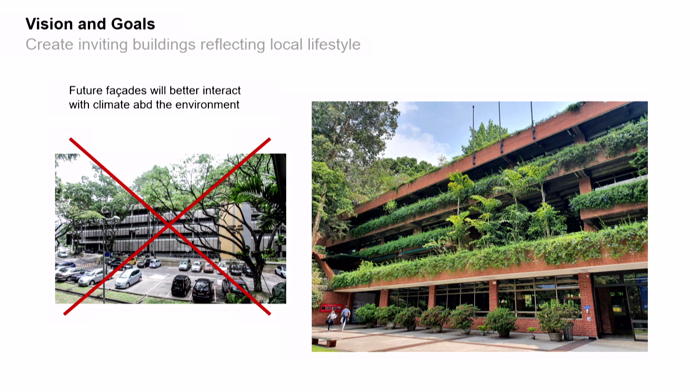What we saw in this building basically was a huge opportunity, envisioning ourselves the changes which are required to create a building which is comfortable, which is inspiring, where I would like to work, where I would like to teach, where I could imagine my children to study. That was the idea, to think about how could the facade look like? How could the facade, instead of being a barrier between a carport and a building which is completely sealed, become something which is blending between inside and outside, pulling people into the building and becoming a nice entrance. We started with the vision for the people.

And what we found, it's so obvious that that building needed a change, because there was no daylight, there was no view to outside. Even the fresh air you cannot call fresh air. It was bad fresh air, low comfort, no quality. So that was basically what we found, but we saw there is more opportunity. Just one more slide for the facade. The facade was designed to block off tropical sky, but basically ended up blocking all daylight.

So with this starting point, we have been trying to support the design team around Eric with communicating ideas, potentials, what we see. And I remember walking with Eric through the building, standing up on a chair, trying to open the false ceiling, taking the flashlight of my camera, flashing into the false ceiling, and I just received a black image. Nothing. This was a huge volume, black and blinding out. Even with my flashlight, I couldn't see anything. So we figured out there needs to be something. There is something.

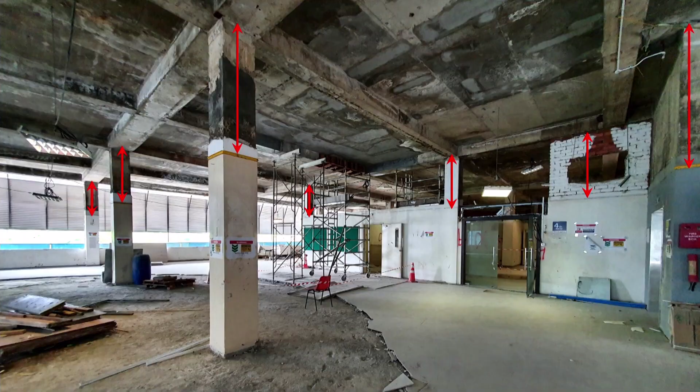And we offered analysis like this, here you see what has been hidden in this diagram. So we offered diagrams where we always looked at how we see the existing, and keep your eye on the word existing, and what is the potential. If you really get all the false ceiling out, this is the potential we saw.

We never made these inputs to Eric and to NUS as design decisions. It was more food for thought. It was like, we see this potential, take it seriously, don't let a physicist like myself design something. Take it with your professional qualities as an architect and take it further into design. Again, we showed this is the existing quality at the moment for daylight, and we could imagine that it becomes a far more daylight autonomous building with a higher daylight autonomy.

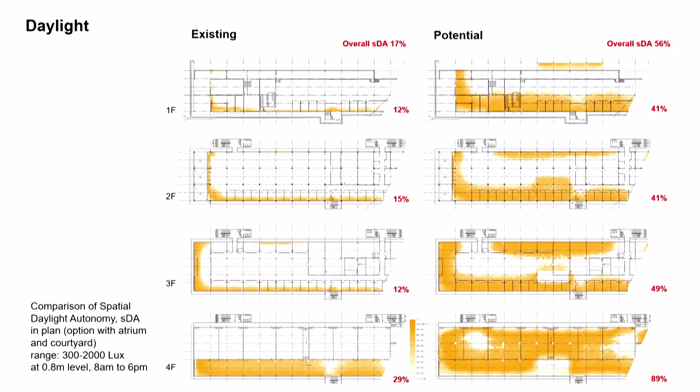Similar things for the thermal zoning, for the natural ventilation. Because of no daylight, no natural ventilation, because of the closed facade, it was a completely air-conditioned, sealed building at that time. And we suggested, let's be crazy, just make 2/3 naturally ventilated. I'm completely aware of the limitation of natural ventilation in your climate, but we suggested this to have a strong voice for changing something, for making the facade and the building as an entity operational for people. Thinking about hybrid comfort, thinking about a different zoning which allows you to think completely differently about how such a building could work.

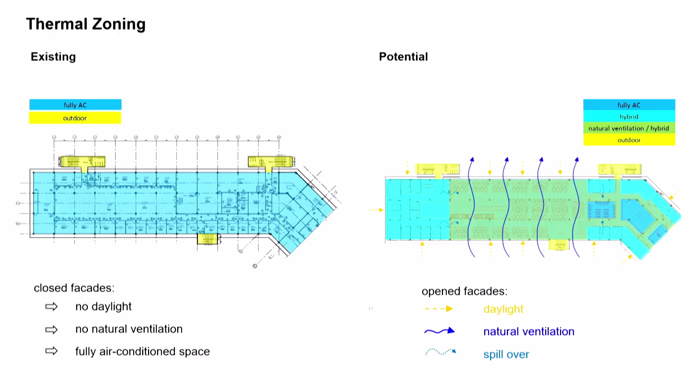This is a typical section which shows elements we evaluated in that early schematic design change, to verify this is not just dreaming, it would work. This kind of building would work, and that's what we then sent back, exchanged with the design team of Eric to say, trust, it works. We can have the facade upgraded, the windows upgraded, we can have daylight. Your external shading system, which was nicely designed and taken over by Eric, works. It brings daylight into the place, and you see in the next slide how it's implemented.

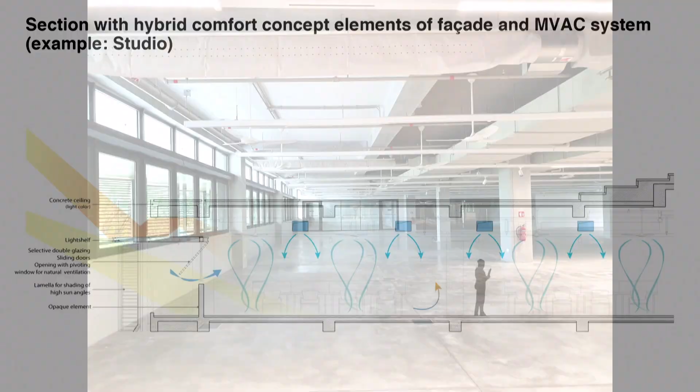You have seen these slides before, so somehow you see brotherhood in mind between architect and physicist and climate engineer. We had not been talking about what we were going to show. Just see the white ceiling to make it better bouncing back, and I will finish this part of my presentation. I was visiting the space with Eric a few months ago, and I was specifically looking for that position in the studio where this famous quote was taken, and it looks like this.

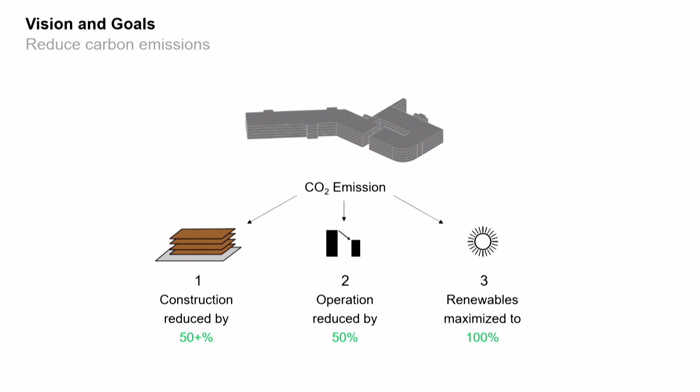Let me zoom out from here and talk a little bit about low carbon design. Basically, what we typically do when we start working on projects, we try to create a vision with the design team and with the client, laying down 3 basic steps: reducing carbon emissions in the construction, in the embodied carbon, reducing carbon in the operation, and replacing all the energy with renewable energy. This 3-step, kind of simplistic, is a super strong story to help everybody along the design process keep track of what we are doing.

Typically, and professionally speaking, that's done with a life cycle assessment, and there are the different phases on the screen. What my company, Transsolar, has done for 30 years is typically focused on a sub-phase, which is B6, operational carbon because of energy use. What we did for this project, we looked for cradle-to-gate carbon numbers in the construction, and we added the reuse or the omitted carbon emissions because of the adaptive reuse of the buildings.

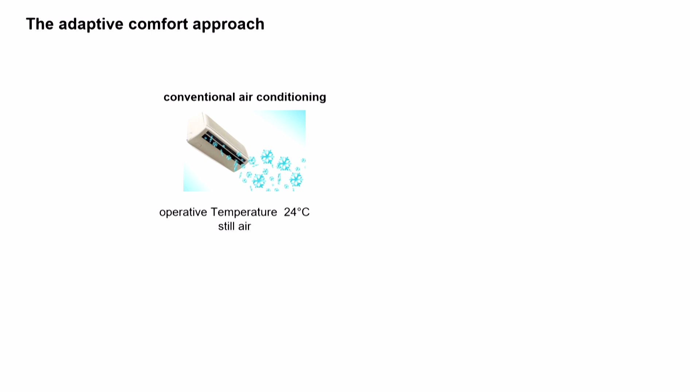And we went through that process. Many of you who have been working with me know that we have been instrumental in implementing the hybrid cooling system in the School of Design number 4. I will not talk about it, just show one slide. It is the idea of making comfort in a different way, which is similarly comfortable, but doing that with less technology and less energy. Back to carbon in the structure. Reducing carbon in construction.

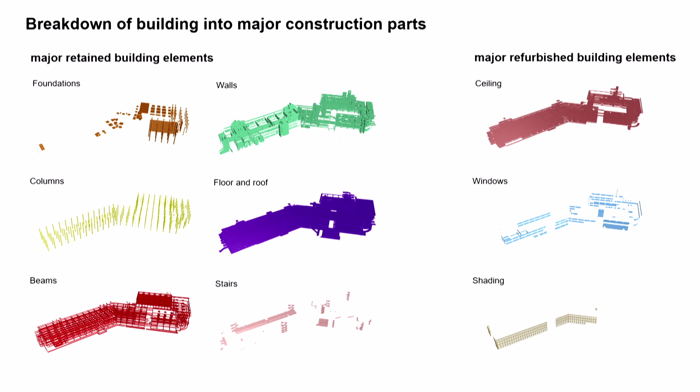What we took at that time was the 3D model we could receive from Eric's team. We broke the entire building down into major parts which are retained: foundations, the walls, columns, the floor and the roof, beams and stairs, and building parts which have been refurbished, like ceiling and floors, windows and shading. And we estimated the masses and the construction types of this, and we took images like this, and I've been talking with a structural engineer to help me.

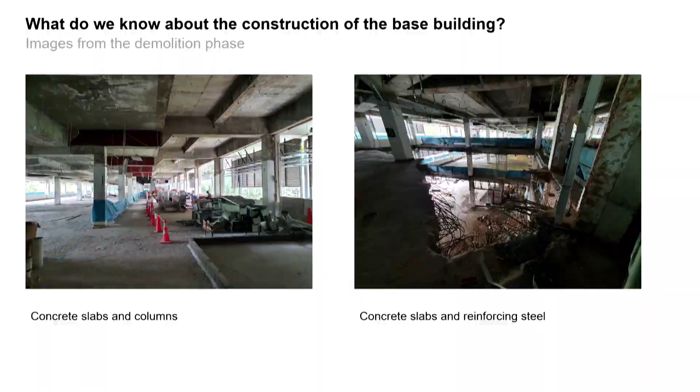How much steel could that have been? What kind of cement was that? Is that a concrete 25, 35, whatever, to get a good idea of what kind of materials have been used. This is one part. You need the material and the masses, but then you need to think about what are the specific emission factors. And at that time when we did that in 2019, 2020, it sounds ridiculous, we couldn't find these numbers for Singapore. There was no database existing.

So I said, oh, no worries. We have in Germany a good database, Ökobaudat, since 20 years. So let's just build that building in Germany using the German numbers. And the German numbers are in the range of the red dots. And we figured out, let's be careful, do the same thing for the UK numbers, ICE numbers, Inventory of Carbon and Energy, using international numbers which are published in the UK.

And then in a third step, we went through some scientific papers and publications in Singapore to figure out what are the local cement and the local concrete values for carbon emissions, in the absence of having better numbers. So we had a kind of lower, a mid, and an upper range. And I apologize for this complicated diagram.

And then based on the masses, based on these different carbon emission factors, we developed 3 scenarios. From the top, if this building would have been built using the carbon emission factors to our knowledge in Singapore, we estimated something like 500 plus kilogram CO2 emissions per square meter of floor, roughly. We figured out that the ICE would be in the middle, 400 plus, and probably the German, if that building would have been built in Germany, would be in the range of 250.

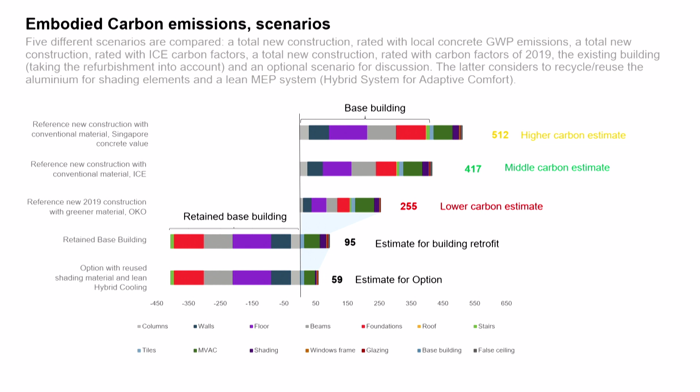And the last is what Eric was talking about. We imagined at that time a reuse of all the shading and aluminium in the facade, which we couldn't get through the design process, but that would be the last option down there. Cross-checking if these numbers make sense. Sorry, before I do that, let me set carbon emissions in construction in context and in perspective to carbon emissions in operation. That's done in this kind of carbon story here. I just use it for setting that context.

These are numbers, take care, absolute kilogram per square meter over 30 years. The golden and the brown is the embodied carbon, and you see in the first step how the embodied carbon is reduced because of the retainment of the original building. And we just had that comment before from Ken Young from BCA on how important operational carbon and operational emissions in Singapore are, and you see the huge blue bar dropping down to the super energy efficient system in operation by changing the way the building is operated.

And then it goes on with the green bars to show how much of this energy could be produced on the roof and how much could be produced in the microgrid. That was our conservative estimation in 2019-2020. Just this morning we learned that you are on net zero for one of the buildings. So we have been super conservative. Basically that means that you already go from here to here without using grid or energy which you borrow from your neighbor. I understand that you are net zero in the definition that the energy produced on the roof goes into your building.

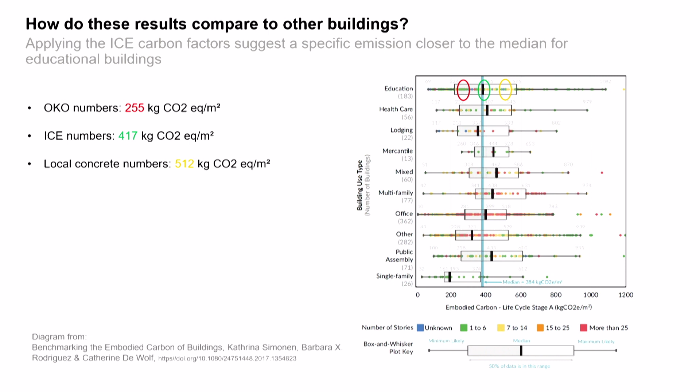The lower, the middle, and the upper range, and compare these red, green, yellow to numbers or to a statistic what we find out of the US. And it made sense for an educational building that they somehow, with the different use of carbon databases, somehow mimic the range of existing buildings in statistics. So we felt quite good.

But when I was looking on the then, a year later, published data from BCA, I was surprised to see that BCA has numbers for non-residential in the range of 1,000, 1,500 for residential, and 2,500 kilogram per square meter carbon emissions, which is quite high. And being a scientist, I think this is something where I suggest that universities, that NUS, dig deeper, make a deep dive. Where is that coming from?

As much as I trust that we have found the kind of yellow, green, red range, if that building would have been built according European standards, I think there needs to be some truth in these super high numbers for embodied carbon in Singapore. And I can imagine that by the different bylaws which exist in Europe, which force our construction industry to be very material and resource efficient, as a byproduct, we already use less material and have less embodied carbon.

I think that's something which I really suggest to be a research topic in the next years for the NUS, to figure out where the difference is coming from. I've been visiting buildings here, high-rise buildings with transfer slabs of 7 meters high, things which are not existing in Europe. I would not be aware of a building, you probably, Hussein, but I would not be aware of a building where I find transfer slabs of that massive material, steel and concrete use.

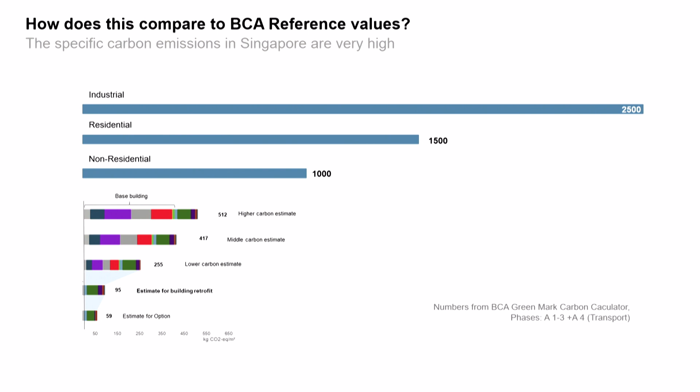So I suggest to figure out where that's coming from to bring both worlds somehow together, because we need to explore the low-hanging fruits. And if this would be that the construction can be smarter using less material, that would be my first choice to do. Because this is something which can be solved with intelligence and with money. Okay, 3 more slides. I zoom out.

What really matters are low carbon projects. This is an example I've had the privilege to work with in Sydney, a high-rise building. And what you see is a building, and you see it a little bit, it's stacked out of habitats of 4 plates. And these habitats basically are concrete steel slabs on which a 4-level completely wood building is sitting, and then again another concrete steel slab and another wood building. This is to bring both worlds together.

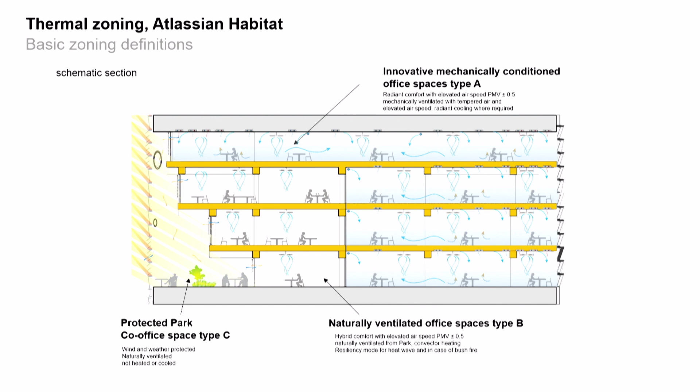You can do that out of concrete, but you can put wooden structures into this and use the benefit of the strength of the steel and the concrete for the structural stiffness, and put in the wooden structure. Why would you do that? Because industry and building industry, and that probably sounds ridiculous to you, has a possibility in the next 30 years to contribute through absorbing biogenic carbon into our buildings to buy us time.

By getting wood, CLT, mass timber into the buildings, and keeping it safe in a building, we reduce and we bring carbon and biogenic carbon out of the atmosphere into a kind of storage process. And we are going to build a lot on this planet. So there is a kind of inherent storage possibility in the design of buildings if we would like to explore that.

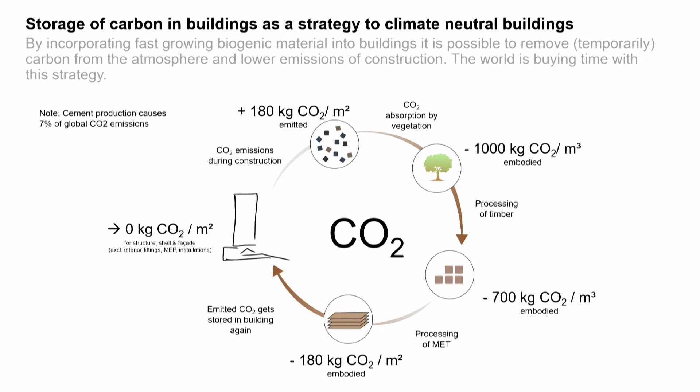And that cycle matters because as much as we like to and need to work on reduction of emissions, at the end, we still have emissions. It's still more carbon in the atmosphere than before. And the only mechanisms which exist are nature and bio-driven mechanisms. Trees and our oceans, which absorb carbon out of the atmosphere.

And we need to absorb carbon in a range, and that's a number I learned on the 80th Forum for Life Cycle Analysis in Switzerland. We need to absorb carbon and store carbon if we want to make a benefit to the climate for 300 generations. 100 generations to 300 generations. That's something like 3,000 to 8,000 years.

And when I heard these numbers, oops, hard to imagine. What I can imagine is that we buy us time for 30 years to think, what the heck are we doing? Thank you very much.

Thank you, Wolfgang, for that. A lot of numbers to digest, but it's important to quantify. When you talk about sequestering carbon, I was thinking of keeping the soot in the chimney. That kept the carbon there.

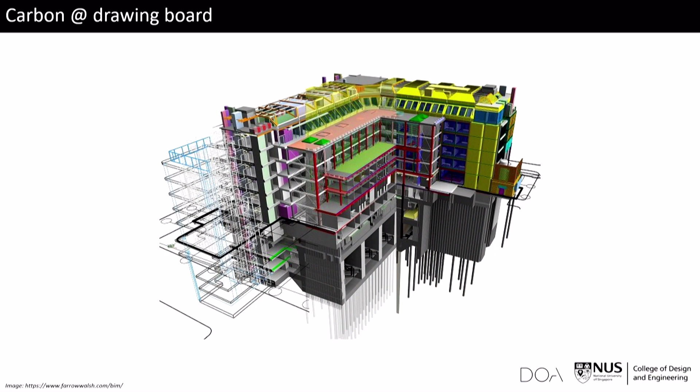Now, carbon in the teaching of design is very challenging. Why? Well, as you heard from Wolfgang, it's complicated. And if you're going to do it in a design studio in a very rapid amount of time, then it proves very challenging. I mean, every piece of a building has a carbon impact. Every piece of what you put in there comes from somewhere. And then you've got the longer issue of operational carbon and energy and where that energy comes from. Most students aren't able to process all of that.

Now, I'm going to show you the BCA carbon calculator, which attempts to reduce the granularity of the problem into a spreadsheet. So this is the BCA carbon tool, which requires inputs on quantities of each material, the place of origin, the choice of transportation, etc. I mean, this is clearly the type of tool that is very useful in what I call downstream thinking. It's a kind of an accounting tool. Once you've made the design decisions, great, it'll tell you where you are. But how do you begin, right? Where does carbon begin to shape upstream thinking as opposed to the downstream accounting?

In design, we often start with very strategic decisions about the form of the building, and this is central to what we do in the training of architects, where we talk about situation and purpose. And many of these early decisions have a very profound impact on the life of the building, both in terms of its energy use and its adaptability.

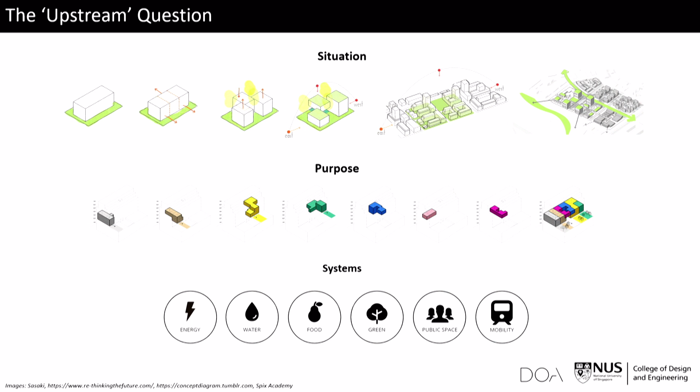In the program that I co-direct with Man Sam, we have what's known as a systems approach to design. And here we introduce an additional layer of thinking into the design process, which is to say that we ask our students to not just demonstrate how their buildings consume less, but how they then go on to produce energy, water, food, accommodate biodiversity, public space, mobility systems within the design that they're proposing.

So they have to bring into this conversation these additional systemic layers. So before I talk about how carbon feeds into it and what the carbon calculator does, I just want to show you an example of one student's work from an earlier semester. This was the work of Noopur Joshi. Typically what we do is we start the studio off by giving students projects, buildings in Singapore, and we say, now go redesign it, reimagine what this would look like if you were to bring systems thinking to the table. So she picked, rather bravely, I think, the Singapore Parliament project.

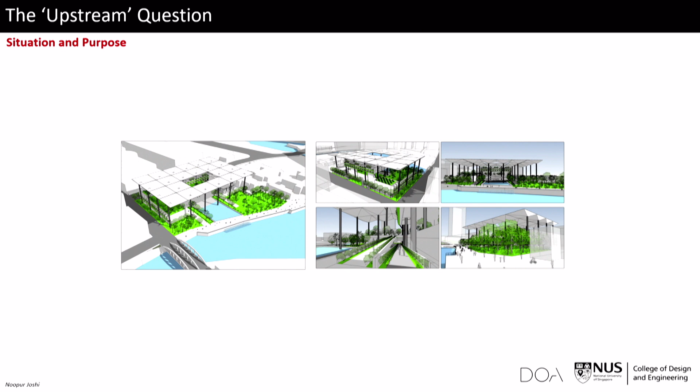The upstream question, of course, had to address situation and purpose. They're not excused at any point from dealing with architecture as architecture. Just because you're dealing with systemic layers doesn't mean that you have to forgo functionality or amenity or basic design logic, and it's got to look good as well. I mean, as an idea, it's got to have something going for it. But onto that, we then asked them to demonstrate how the project integrates layers.

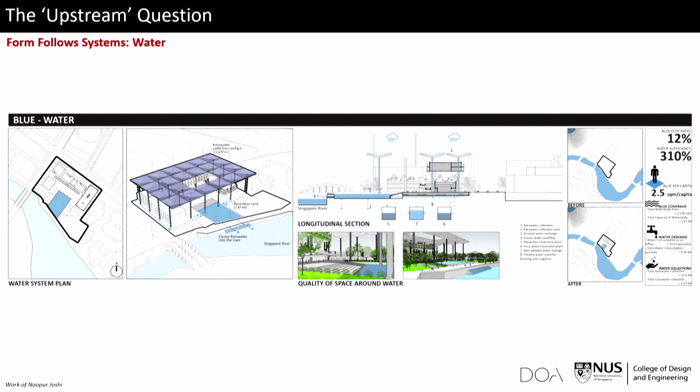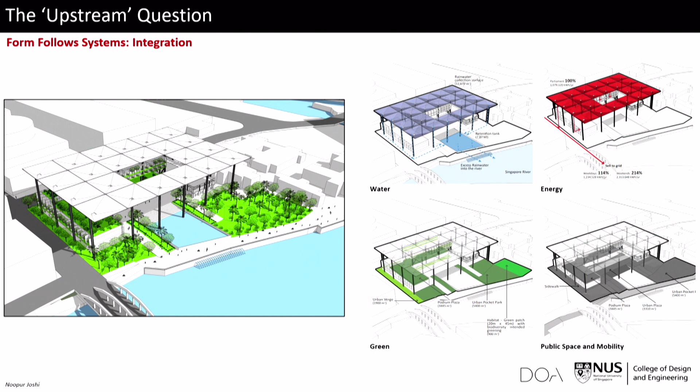Here is, for example, the integration of water as a system. Here is how energy was introduced into the system. So they actually have to not think about these things in sequence, but simultaneously. I'm oversimplifying it a little bit by showing you these images as a sequence of events, but really it's a battle. So much of it is about unlearning how they've been taught to think about design and to bring additional layers of thought into it. It becomes a battle on how to bring additional thought processes into the way you do good design.

What's interesting then is that when we step away from the work of many semesters, and we've been doing this form follows systems studio for quite a while, we begin to notice that there are a few key defining aspects that at this stage of thinking, this conceptual stage of thinking, students are grappling with. One is the boundary conditions of porosity, the envelope, space and structure. How does this relate to carbon?

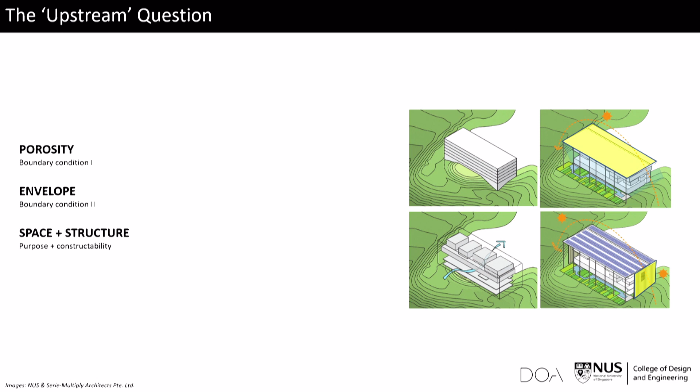Well, that's interesting because here is the SDE4 building, the images that were published by Serie-Multiply at the beginning of the process. And there is a parallel to what the students do in that the very early conceptual thinking about the form of the building begins to look at porosity, begins to look at surface areas, begins to examine the relationship of the building to the climate. And the things that come out of this that have an impact on the performance of the building, these ideas, they shape energy demand, they shape capacity for onsite power production, and they offer the potential to shape materiality.

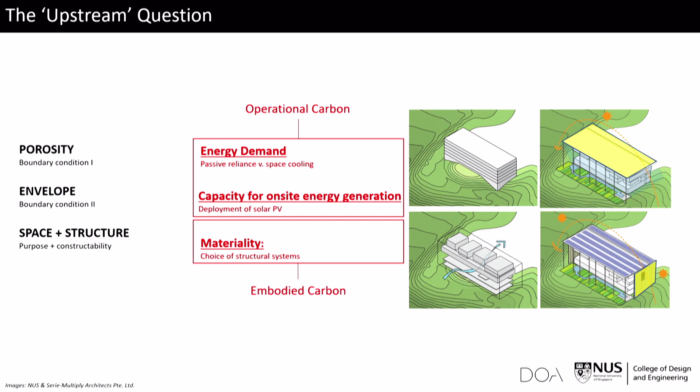And these, in the context of what Wolfgang was saying about what shapes carbon, affect both operational and embodied carbon. So if you can make the right decisions at the beginning about porosity, about boundary conditions, about materiality, tectonics, you potentially have the possibility of impacting the life cycle carbon of that project. So how do they do that? Well, this is where Alakesh, my co-author, came up with this simplified carbon tool. It's for architects who go a little cross-eyed if they see too many numbers and graphs. This was the perfect solution, which is to say, you've got a design, put in the numbers, and the tool will spit out the outcome.

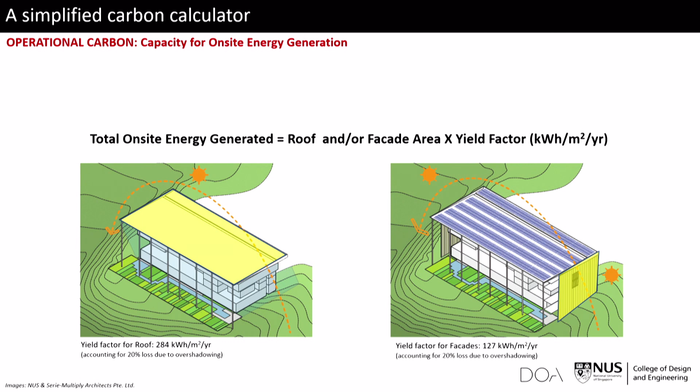How does it work? Well, on operational carbon, there are benchmarks describing what a typical building in Singapore consumes. We had ideas of by how much the overall efficiency of the systems could be improved. And this had a lot to do with benchmarking high-performance buildings in Singapore. And then to that, all they needed to do was enter the areas for space cooling and non-space cooling, and that would give them, in a very simplified way, the energy demand, a guesstimate, if you will, of how that building is doing. The question of energy production had to do with the envelope. The roof had a certain yield potential, facades a different yield potential.

And the total operational carbon emissions would be the total energy demand minus the total energy generated multiplied by the grid emissions factor. And the grid emissions factor is basically describing how much carbon is embedded in the electrical power that we get, depending on what the source of fuel is. So in our case, natural gas. And so the number for Singapore is 0.48. All of this is pre-programmed. Don't need to think. You just plunk in your surface areas and it spits out the answer.

Embodied carbon, we simplified it, dumbed it down a little bit to give them various options of structural systems. So the first option was, and these figures on the intensity of embodied carbon for different structural systems for different types of buildings came from literature, meaning these are published data, not for Singapore. And so this is obviously a room for research. We should do that, but also with inputs from Wolfgang and Gregers.

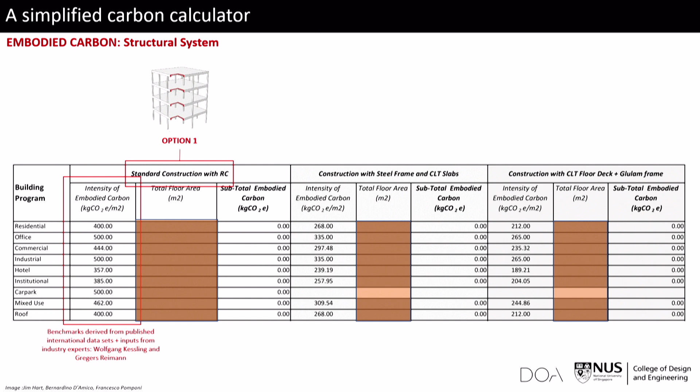And then students were given a choice of either having full RC, steel with CLT, or CLT with full timber. And so they could make hybrid buildings, they could make composite buildings made up of a mix of these things, and they would then key in the numbers. Again, the no-brainer approach: enter the surface area of each option, and the calculator would do the rest.

Of course, we held students accountable to basic principles of passive design and structural logic. So if you're going to make a fully timber building, you can't have these massive, heavy loading, wide span structures. So there were certain constraints, rules of thumb put into the process that they had to abide by.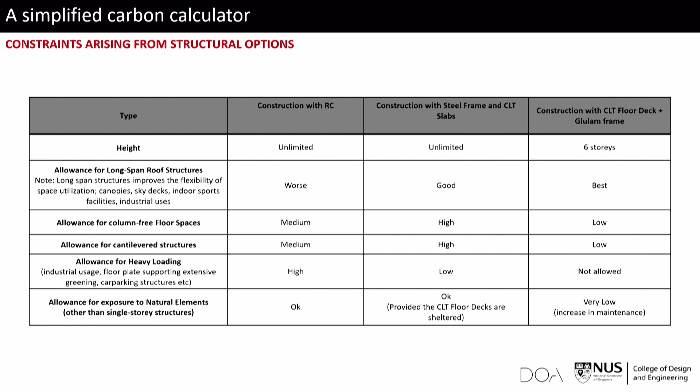So the longer the building survives, the greater the operational component, the less the embodied energy component. This is an interesting dynamic which we have to come to terms with. The shorter the life of the building, the greater the embodied, and the lesser the operational. Anyway, there was also some provision for minor and major retrofits every 10 years.

So I'll show you very quickly the outcome of this studio with the work of one group, one pair of students. They were given this complex in Jurong East, the Westgate Mall, JEM, with the Jurong MRT station and the bus interchange, and they were asked to redesign it. And they had to either retrofit it or completely redesign it.

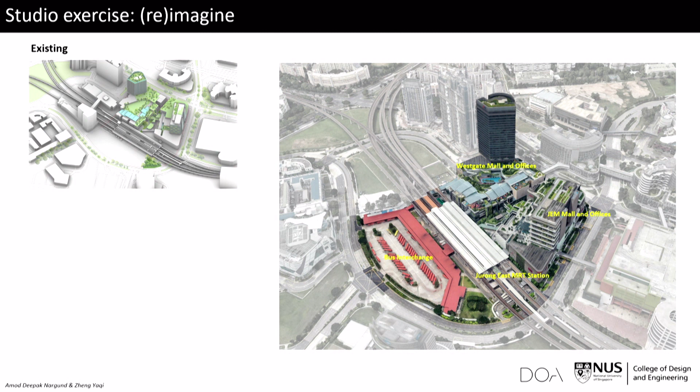Now, the calculator allows for certain conditions of retrofit. In a retrofit situation, you don't get the same performance as you would with a brand new design. From an energy standpoint, that is a given. It does better from an embodied point of view because you've got that material base in there, but from an operational standpoint, usually the performance metrics are not as high.

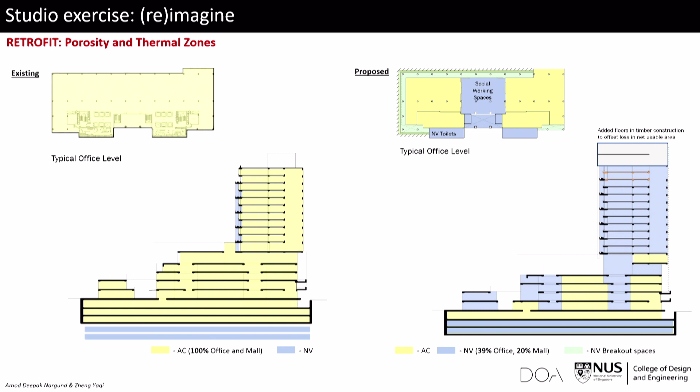So this is what they came up with for the retrofit. I'm gonna flash through the images because they're mostly just illustrating the outcome. They opened up some of the floor plates to create more natural ventilation, reduce the demand for energy, etc. And couldn't do much with the material. The RC building, well, you want to keep it. That's the whole point of a retrofit.

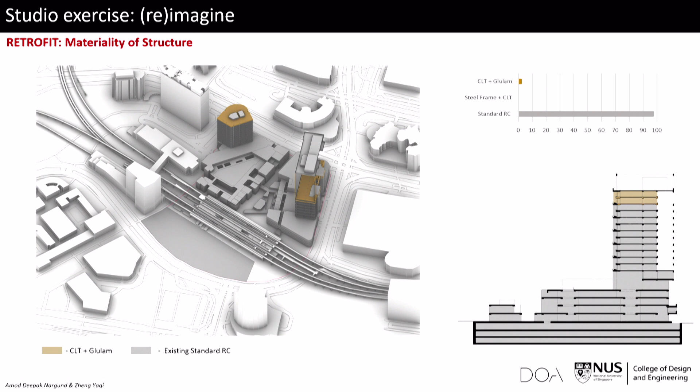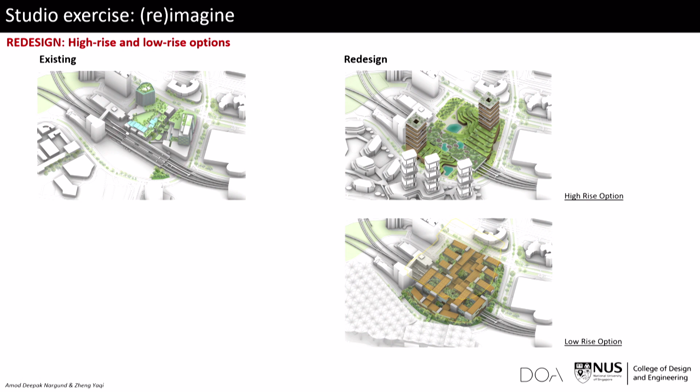And I should add this, that studio is part teaching, but part learning, and we're learning as well, the tutors. We want to know whether it's better to retrofit or tear it down and redesign. That was a question. I'm not sure that it's answered in one semester, but it was a question that we were asking. And so ISD studios tend to be kind of de facto research processes.

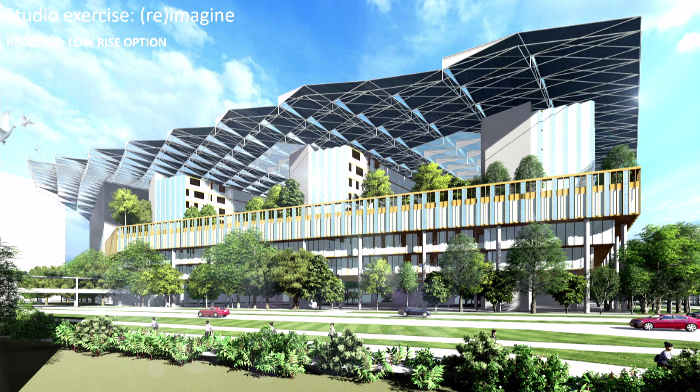So they came up with a high-rise option where there were 2 towers and a podium with much more solar PV and greenery than the retrofit would have allowed. And they came up with a low-rise or medium-rise 8-story with a much flatter roof so that you could maximize the potential for solar and so on.

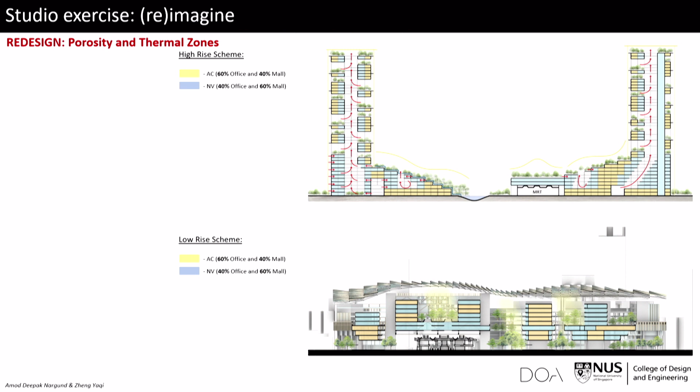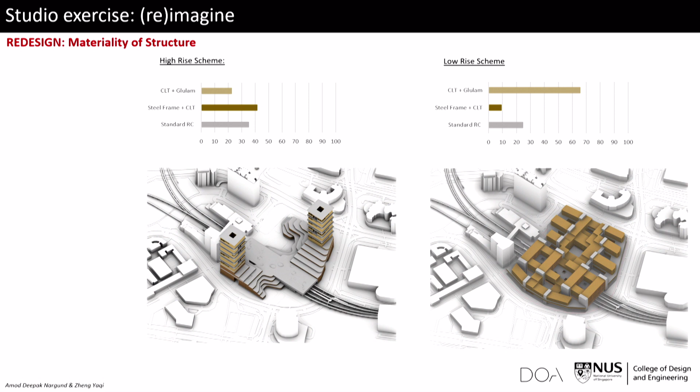Now, some of the interesting things that popped up were that actually the redesigned building overtakes the retrofit building in terms of a 50-year life carbon usage. And that's because the calculator operates on an assumption that with a redesigned building, you can have much deeper gains for operational energy. Keep in mind that for a 50-year life of a building, the operational energy is about 80% of total carbon emissions. So it's weighted depending on the time. If you had narrowed that window to 40 years or 30 years, the numbers would have been different. But there is a point of parity at which the retrofit and the redesign cross each other with this calculator.

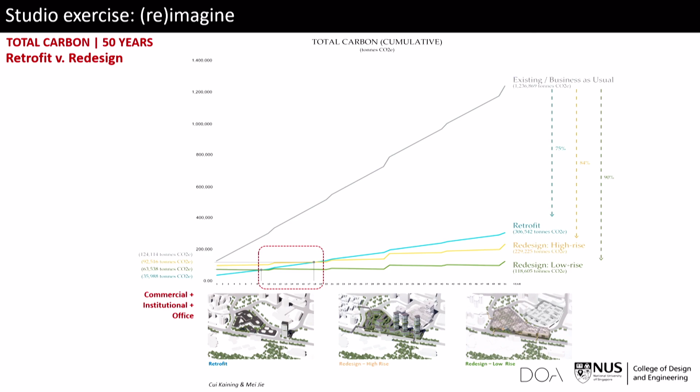And this kind of shows you. We saw this consistently, and I should add, it's a sample size of 5, so not quite research worthy yet, but in all 5 schemes, the redesign scheme did better over the 50 years than the retrofitted scheme, notwithstanding the embodied energy. That's a question. It's not a solution. I'm not saying that you should automatically tear down and build again, and there are many reasons for keeping buildings, but I think there needs to be a lot more research done into how this plays out over time, right?

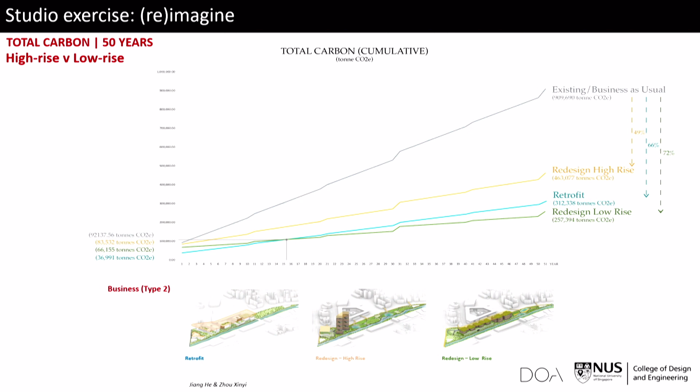The other question that we were asking is what this meant for high-rise and low-rise buildings. Again, it's very clear that the high-rise building doesn't do as well as the low-rise for obvious reasons, the potential for solar on-site generation. But it's not just about carbon, right? It's about other systems as well. And the high-rise option gives you other privileges. It allows you to use the ground in different ways that a low-rise option may not. So you kind of weigh out these discussions as you go along. The graph doesn't tell you exactly what you have to do, but it gives you the relative position of the various options.

Sorry, too quick. And finally, the question that we were asking was, is there anything that becomes carbon negative? Residential developments over time, especially if you go for redesigned low-rise, can actually begin to extract carbon out of the system, meaning they are producing more energy than they need and therefore offset carbon, right? So again, the studio was the beginning of research, and these are the questions that emerged from the studio that I think Mansa, myself, and Alakesh are going to keep poking at and see where we go with this. And the other thing that we want to do this semester is to examine what this means at the urban scale. How do we aggregate buildings and create a carbon story in neighborhoods and so on? That's it. Thank you.

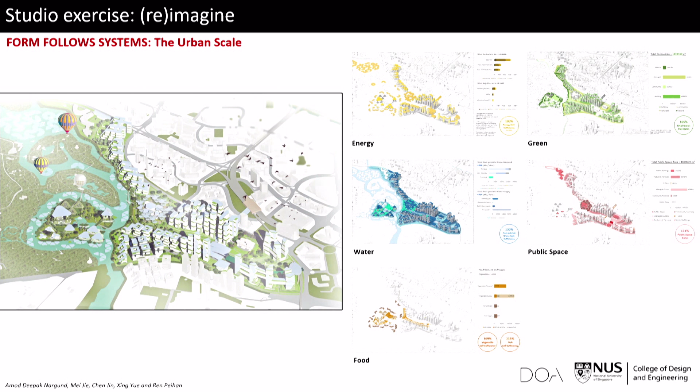The profile of students in the program. How many are architectural? How many are engineering over the years? Right. So the question is how many architects and non-architects do we have in the program? We're still a bit weighted towards architects, meaning about 60 to 70% architects, but then we have about a third to 40% who are not, who come from different disciplines, engineering, environmental science, landscape, and so on.

Well, thank you, Namal. That's clearly a good start in this push towards a cross-disciplinary approach to solving integrated and complex issues like that. I'm particularly happy with the question just now from the student from biological science and many other disciplines. The next speaker is Associate Professor Kua Harn Wei.

I have to tell this story, Han Wei, because Han Wei is an alum, but not from our school. He did his master's degree at NUS as a research master in theoretical physics in 1999. And then he came to see me. I was the dean then. He said, Prof, I really want to apply my knowledge in the built environment. Is it possible? I said, of course it's possible. And that journey began in his career. By the way, I had to convince the university admin to allow me to hire him. The first question the provost said, why are you hiring a physics person? You're architecture, nothing to do with you. I'm not making this up.

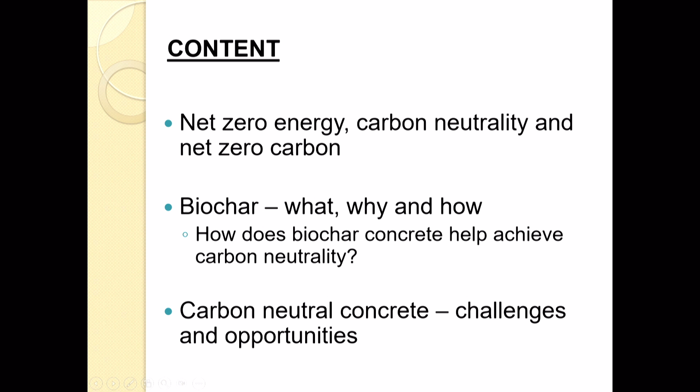And today I'm going to talk about something rather different from the materials and engineering aspect. And I promise you I won't be talking about the structures of protons and neutrons, all right? From net zero energy to carbon neutrality, what does it actually take from the materials aspect, from the system perspective? All right, this is my outline, and I'm going to start with some basic definition so that we are all on the same page about what we mean by carbon neutral before I go on to something which I've been working on for the past 7 years or so, and that is biochar.

Net zero. And I think by now, when it comes to net zero energy, we know that it is about balancing what we need and what we produce on site. However, we all know that in the classical definition of net energy, we might not have considered life cycle or embodied energy. Let's talk about energy first before we deep dive into carbon. So for that, we need life cycle assessment. It's great that we have already talked about life cycle assessment, Wolfgang and of course Nema. So over here, I'm just going to very briefly and quickly run through the whole idea of life cycle.

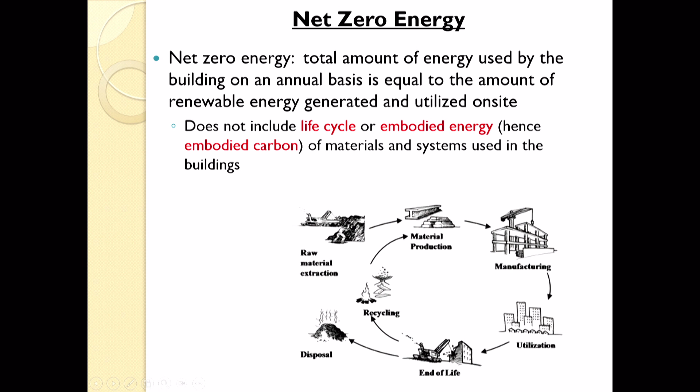As you can see here, these are the different life cycle stages of a material. Let's say building material, any material, steel, cement, and so on. So in life cycle assessment, basically what we are doing is that for each and every one of these stages, we account for the input and the output. And when we want to zoom in onto carbon, it will be about the carbon emission due to this input and output. We do this for each and every one of these stages. Sum them up. This is how we account for life cycle carbon. Very simple concept, very easy for me to talk about, but extremely hard to do it and to do it well, just like life. Talking is simple, doing it well, difficult.

So how about carbon neutrality? And what's the relationship between being carbon neutral and net zero carbon? So to explain that, I would like to depend on a picture contributed by Schokker in 2020. So over here, you see that at the top line, and focusing on concrete. Let's talk about concrete because of the somewhat notorious emission profile of cement. You find that in concrete, let's talk about cement first, the carbon emission can come from two places. Emission due to fuel, fossil fuel, that's it. And of course, in the calcination of limestone, to give us the clinker, and then with that, cement. So the whole concept about being carbon neutral is that I've got to do something here in order to offset.

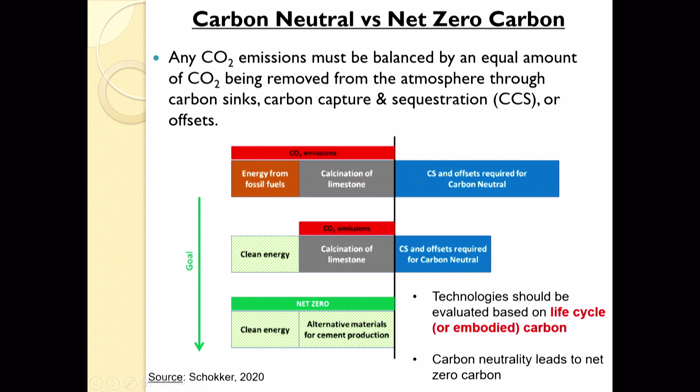All right, so these are 2 points which I would like to emphasize, and I think it's great that you guys have already talked about the importance of having life cycle carbon assessment.

Moving on, carbon negativity. All right, Namal, good. We didn't really pakat to talk about this, right?

All right, carbon negativity. You have heard some people talk about it. At the material level, is it even possible? Well, it depends on how you define carbon negativity. Let me share something with you. And that is something that I have to talk about, and that is biochar. Traditionally, biochar has never been talked about within the construction material realm. All right, so what is biochar?

Self-explanatory. It is a byproduct of a process which is already well studied, well understood. And by that, I mean pyrolysis. Okay, pyrolysis is about heating biomass under a very controlled environment. And then, in order for us to fully understand and appreciate why this can be carbon negative, we have to be mindful about a few things. Number one, biochar is just one of the many byproducts of pyrolysis. We still have synthetic gas over here, and of course, bio-oil.

Okay? So what we are going to do is to make use of the synthetic gas to replace an equivalent amount of fossil fuel, and that will give us the carbon reduction. And in fact, I'm very happy to share with you here that a group in Cornell, my colleagues in Cornell, actually came out with an LCA focusing on biochar made from different feedstock, which are shown right here, first column. And they show that in many of these options, carbon negativity may actually be possible.

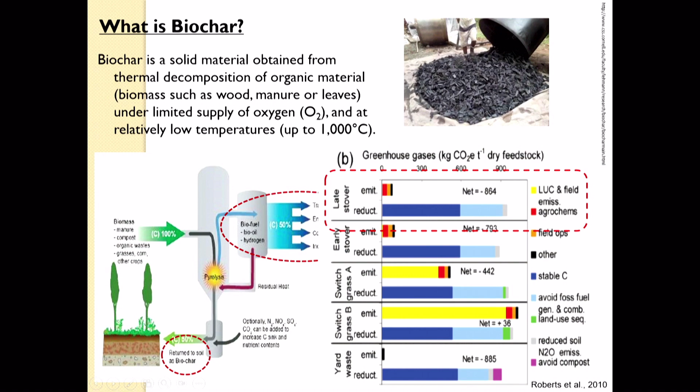Besides that, there is an avoidance component. By using the synthetic gas to replace fossil fuel, you avoid having to emit CO2 due to the usage of that equivalent amount of fossil fuel. So, and there is more.

So at this point, I would like to switch gear to talk about biochar concrete. It is a carbon-based discussion. You are not going to see equations coming out over here. There are altogether 6 ways by which biochar concrete can contribute to a net reduction in carbon. However, I would like to mention something.

Even if biochar is carbon negative, it doesn't mean that if I use biochar and I put biochar into concrete, that concrete is going to be carbon negative. It doesn't work that way. All right? It doesn't work that way. But at least, as you will see in a while, it can contribute to reducing the overall carbon emission of concrete. Starting from point number 1, the C, the carbon C, or rather the stable C that's locked in the concrete. Secondly, like what I've mentioned just now, the avoidance.

Avoidance can be in the form of CO2 emission reduction due to the amount of cement that is saved or avoided. Incineration of wood waste in an incineration plant: if we divert the waste stream to concrete, we avoid having to direct those into incineration. And of course, the avoidance of fossil fuel and the emission due to that.

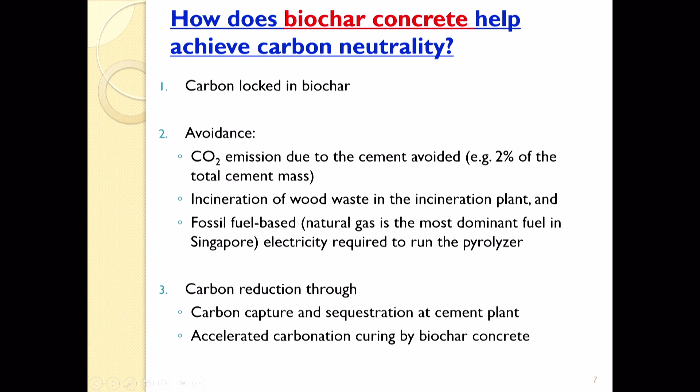Next point is interesting. It is a rather new concept called ACC, accelerated carbonation curing. I've been working on this, one of my papers, hopefully is going to get published. I think a few of our friends from civil engineering might have heard of this as well. So carbonation, as we all know, is a process that happens in nature. It is about the mineralization or the conversion of CO2 into carbonates in concrete or in cement.

In the case of ACC, basically what we are trying to do is to speed up the process by exposing curing mortar or concrete in an environment of very high CO2 concentration, and that is to basically use it as a pump or as a sponge to absorb as much CO2 as possible. There's a limit though, and I'm going to talk very briefly about that.

But at the same time, when you have calcium carbonate being very fine particles, reducing the overall permeability of concrete, it will help to bring up the strength as well. So there's a plus and a minus. As in Mother Nature, it's all about balance. And therefore, the net strength can go either way when you use ACC on concrete.

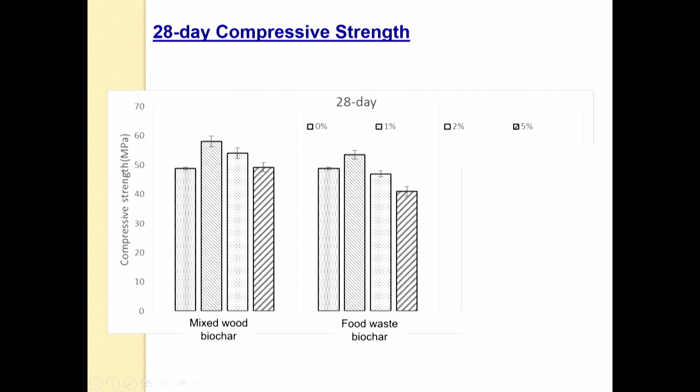So coming back, the fourth point is this, and I get this question almost every time I speak. You keep saying that biochar can strengthen concrete, and it's true. It's not just my team. Many teams around the world have proven that if you add a sufficient amount of biochar, as shown here in these two clusters, we make use of different kinds of biochar from wood waste and food waste, and you notice that the second bar is always higher, and that includes 1% by weight of biochar.

So the question is this: since you have shown that by adding some biochar into concrete, can we actually reduce the size of the concrete component? Well, I'm not sure. Perhaps it is possible. I've not done that kind of research yet, but if we can do that, then that will help to reduce the carbon as well. So one area for you to think about, and maybe even join me in the future for further research.

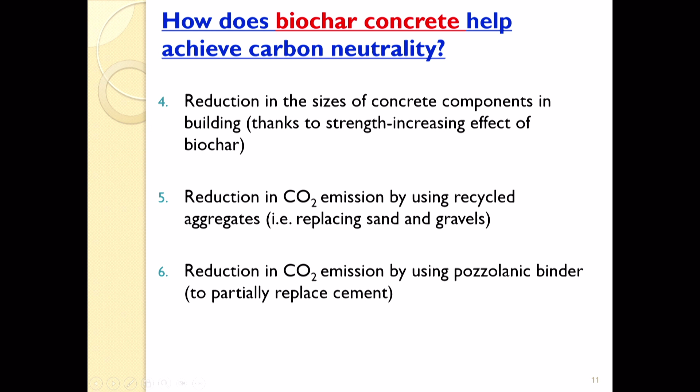5 and 6, we can also reduce carbon emission from concrete by resorting to recycled aggregates, and of course, pozzolanic replacement. Pozzolanic means cement-like. Most of the time, we make use of different waste-based material to at least partially replace cement in concrete. Take a step back, we have altogether 6 different ways by which we can reduce carbon emission in concrete.

So I think many of you will have this question in mind. If we are going to put all these factors together, how is our concrete performing now when it comes to net carbon emission? Are we neutral yet? We are far from that. I'm going to share with you, right after this, some of the cases that I've worked on. But anyway, this is just a pictorial representation of the kind of materials that we have looked at, not in my lab, but as an industry, to hopefully green concrete.

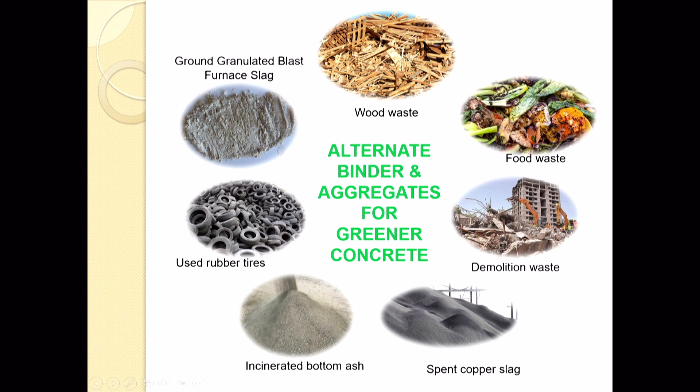This one might stand out, food waste. If you want to make use of food waste in building materials, I think the only way is to convert that into biochar. And I think the motivation is out here. Right now, after a few years, we are still at 18, 19%. We can do better. Perhaps biochar is the way to go.

All right. So now, I'm going to spend the next 2 minutes on this, or maybe a bit more, 4 minutes. Base case: what happens if I put 2% by the weight of cement in the form of biochar into concrete? And at the same time, I'm going to continue using the synthetic gas to replace fossil fuel. I'm not going to do carbon capture because maybe I don't have an option. For example, in Singapore. ACC, right there, 2 millimole of CO2 per gram of biochar.

Now, this is a very optimistic figure, all right? Experimental base, I've just completed a review on this. I'm just going to put it out there, okay, 2 millimole. We'll see how it can be increased in the future. And the rest, I'm not going to change. The result: I only reduce the CO2 emission of concrete by 6%. Better than none, but not good enough.

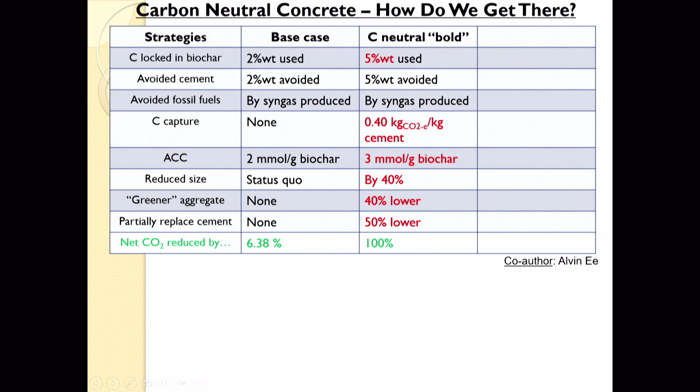So let us get a little bit bold, right? I call it the case study of C-neutral bold. So how bold can I get? Right here, I'm going to make use of 5%. Put in 5% by weight of cement in the form of biochar, and at the same time, take away an equivalent mass of cement. Problem. Technical challenges, number one: anytime you increase by too much, you reduce the strength of concrete. However, I think we have found a way, and there is a way out there, where we can continue to increase the amount of biochar without reducing the strength of concrete.

Secondly, CCS capacity. In this case study, I'm imposing on myself to have at least 0.4 kg CO2 equivalent per kilogram of cement produced in a plant to be removed using carbon sequestration. Is it possible? It depends on your location. Optimistic, I'm going to have an ACC of 3. And of course, in order to do that, I need to increase the dosage of CO2 into the cement or into the concrete. The challenge is that anytime I do that, there's a chance for me to reduce the strength of concrete again. So we have a lot of problems, right? And in fact, if I go down, you'll find that the challenges are there, but at least it becomes clear and we know what are the targets to hit.

Right now, if we are going to use RCA, recycled concrete aggregate, and we are going to use GGBS, we are able to reduce CO2, if I'm being optimistic here, about 30 to 40% respectively. So if I set a target of 40 and 50 here, I'm basically asking myself to do a bit more in order to push them up by 10%. It's not easy, but it's not impossible. And that, if I put it together, will help me to achieve carbon neutral concrete. Okay, very optimistic, I know. I guess that's what sets us apart. We are here because we believe that we can change the world.

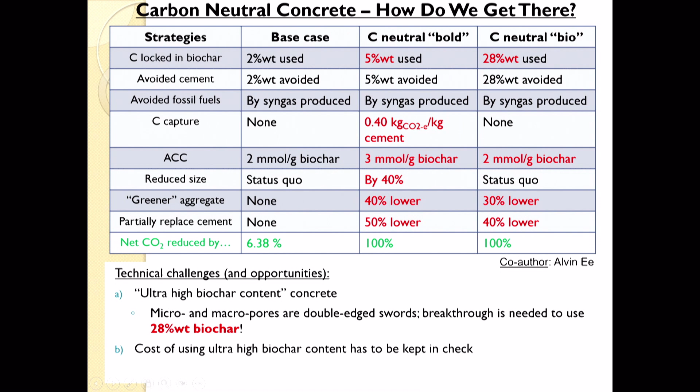It's no longer just a technical issue, but about cost, about policy as well. In conclusion, we can't ignore the importance of renewables. They are here to stay. They are here to help us. All right? Carbon neutrality, zero carbon, they are all related.

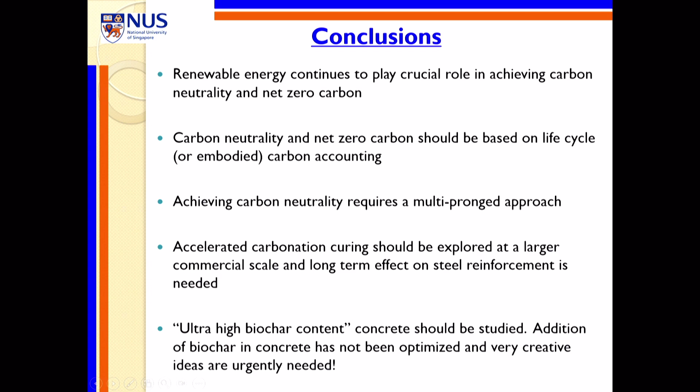But of course, there are certain things that we have to pay our attention on, and that is to see whether we can scale up ACC, which is the fourth point over here. And then finally, my point about going for ultra-high biochar contents. And in fact, you can take away the biochar and put in something which is bio-related. All right, there is a pathway, and I think this is something that we should all work on together.

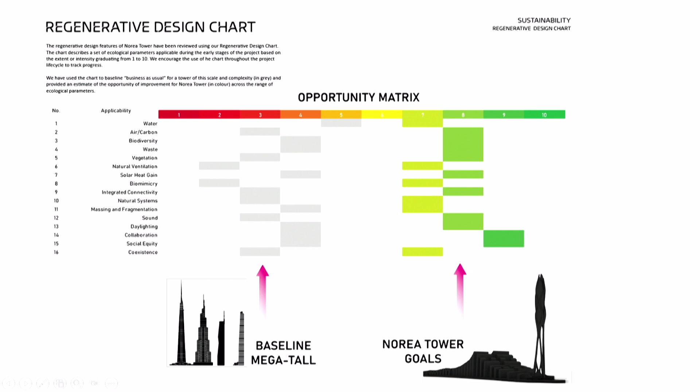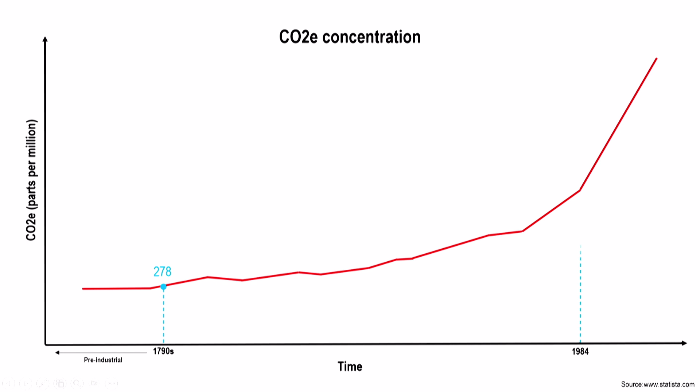What else? Now, looking at the tunnel vision, if you like, of carbon, I want to share a couple of projects. You're familiar with the numbers, the graph, the CO2 equivalent parts per million going up. Since the industrial revolution, about 1790s, the amount of carbon was 278 parts per million. In 1984, around Brundtland, it was 345. Now it hovers around 420 parts per million. In the past 35 years since Brundtland and all the beautiful efforts on sustainability, we have increased as much, if not a little bit more, than the preceding 200 years.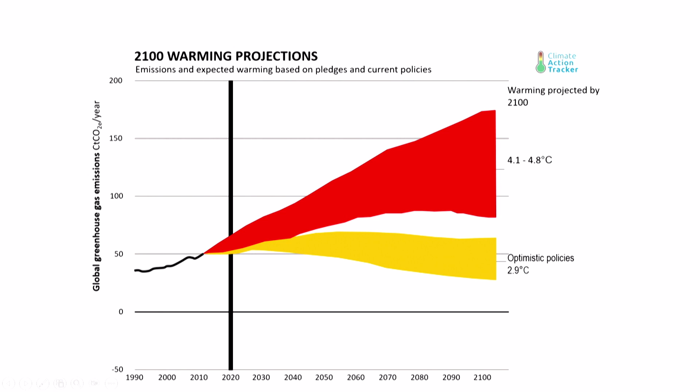Despite all these beautiful efforts, where are we going wrong? What is the problem? Why can't we bend the curve? Because if this is the total carbon emission, greenhouse gas emissions, CO2 equivalent, currently hovering around 40 to 50 gigatons, depending on what we measure. There are paths ahead of us. One is the path of the deniers. We have no problem, we don't need to do anything, we just carry on as we are. We go into 4.1 to 4.8 degrees temperature increase compared to 200 years ago.

And there is a path of optimizers, the sustainable route being less bad, going to 2.9 degrees, both of which are devastating. Along those paths, the construction waste in 2025 is going to be 1.1 billion tons. We can continue to demolish buildings as we do, which have the same environmental impact as setting fire to forests. The amount of chemicals in the next 10 years is going to double in the world, and that really baffles me. More than 30% of these chemicals are harmful chemicals. This is the current path of either the sustainable or the denier's path. The other path needs to bend the curve. The path towards 1.5 degrees is a major disruption.

Almost none of the things that we've done so far, we're doing, has responded to that. We need to change that paradigm beyond cliches and beyond talking about it. And that one is the path of regeneration. Again, we have regenerative thinkers and designers amongst us and teachers amongst us.

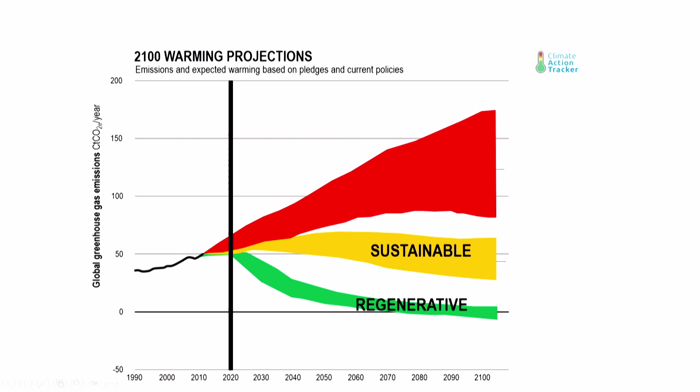And on that path, the natural environment with beautiful colors, symphony of shapes and form, very rich in shape, in forms, but very frugal in choice in use of materials. In contrast, the built-up environment, everything is 90 degrees, everything is square, very, very poor in shape and form, or very wasteful in materials.

So a regenerative environment is one that combines these two, and we still build as we need to build, but we underpin our buildings with the wisdom and the systems that exist in nature. So we need to learn from our biologists. In the whole overall system, we need to talk to people from outside our industry who understand nature better than we do.

In the paradigm shift, cultural change, language must change. We're talking about a different lexicon. The lexicon of sustainable is about conventional materials, it's about fossil fuel, it's about traditional design methods, etc. It is about a monospecies interest, people-centric, human centricity, etc. And at best, it sort of optimizes, makes us a little bit less bad.

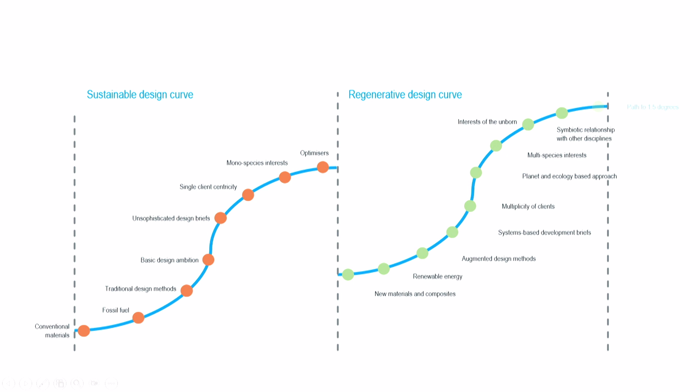The lexicon of regeneration is different. It's about new materials and composites. It is about renewable energy, augmented design methods, etc. Quite different sort of set of words, concepts. Interests of the unborn, the future generations, must be considered in our design. And that is the path to 1.5 degrees.

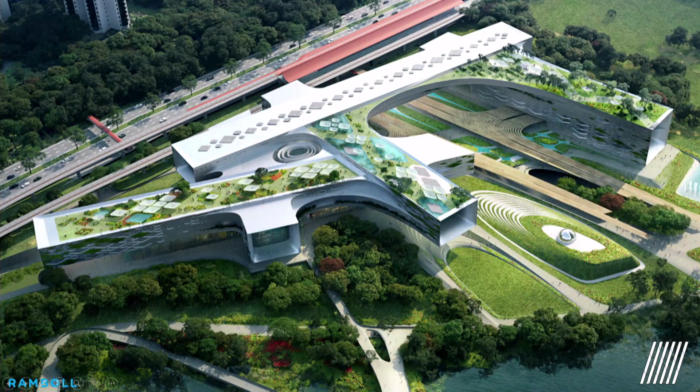Now, with this sort of long introduction, let's talk a little bit about optimizers and disruptors. We're all optimizers. I see myself as an optimizer, despite all the efforts and all the commitments that I would like to think I have to a safe environment for the future. And I share with you a couple of our projects and how we've dealt with it. This is the new Science Center, a competition winning scheme with Zaha Hadid's office.

It is organized around what we call bars, these long elements of real estate. 5 bars, 1, 2, 3, 4, 5 bars, which are oriented to deal with the brief and to create the real estate that we want. Just to give you a sense of scale, this dimension from here to here is 100 meters clear span, which is because there's a view corridor there and no structure should be there.

So the way we did it, through topology optimization, advanced computational techniques, we developed the structural frame as if it would grow from the ground. If this building was designed and built by nature, the structural frame would look like this. It's the skeleton that you have. The white areas are where the higher forces exist. You need more material. The darker the areas, less stress and less material is required.

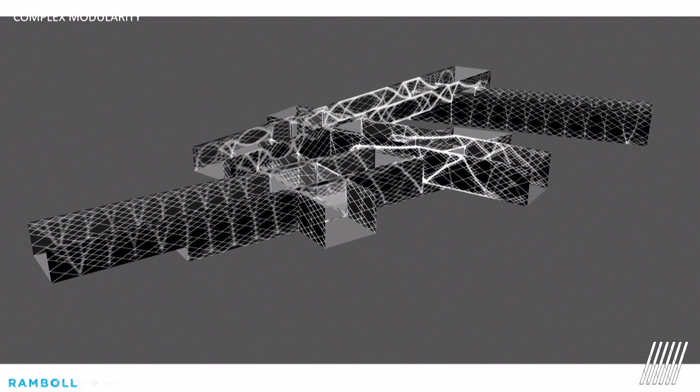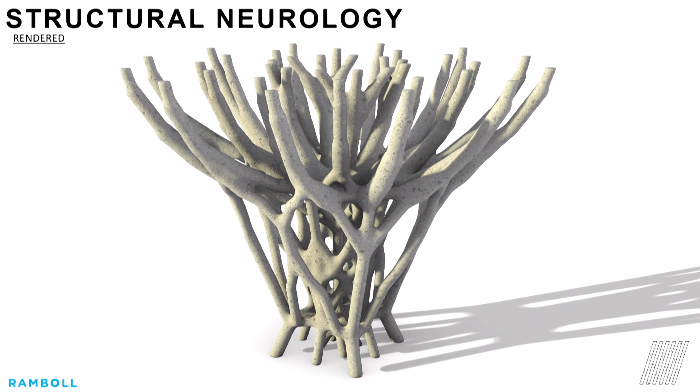This is the model of a single column. A straight column can be modeled like this. From a single column to the most sophisticated tree structure is modeled in this one element. Down here, there are 5 or 6 nodes. If we call this 6 equal to 1, this becomes one column. Or it can become as complicated as we need it to be. We then take it through a geometric optimization. And you end up with shapes which are more prevalent in nature.

If we want to get different results, our buildings need to start looking different. If at the end of the day our buildings look the same as they did 100 years ago, 80 years ago, 60 years ago, look and aesthetic is not the key thing, but of course it matters. If our buildings look very poor in shape and form, then we are being just as wasteful.

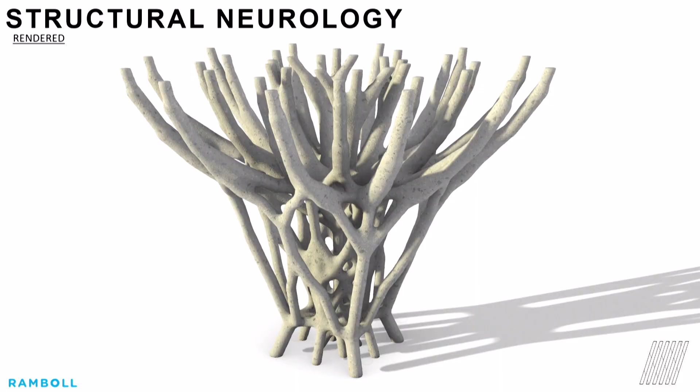So with these things, you get structures which are more of the sort of thing that you see in nature. But to make it buildable with those complexities, we see how we can make this complicated structure with one element size. So we simplify it by all of these being made out of one single size. And it is possible. So you can have a frugality of material, but richness of shape and form. And of course, you could 3D print and other methods that we all need to work on a bit more. And this is a tree structure project we developed with Zaha guys.

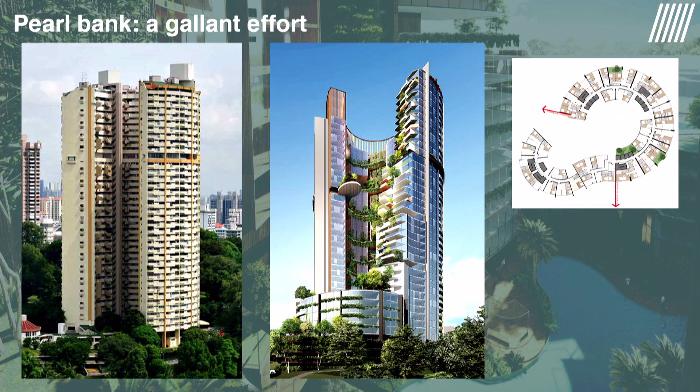That is for new buildings. For existing buildings, of course, there was a lot of talk about retention and how beneficial that is. We've done a lot of good efforts on Pearl Bank. We put a lot of efforts, a gallant effort, I've called it, to retain it and did detailed studies to show how the vast majority of the existing structure could have been retained while the new GFAs could be added, et cetera. We failed there, but our collective efforts, the whole industry's effort, yielded good results on this one that we heard earlier on, which is now retained.

I think in my last couple of slides, but this is a standard, up and down project, 40-something stories. We did about 15 years ago, Grand Hyatt in KL. At that time, the embodied carbon footprint of a structure of that nature would be around 500 kilogram per square meter. Through these optimization methods of 15 years ago, and we are a little bit better now, we've reduced that to 300. And that was about 20,000 tons of CO2 equivalent reduction.

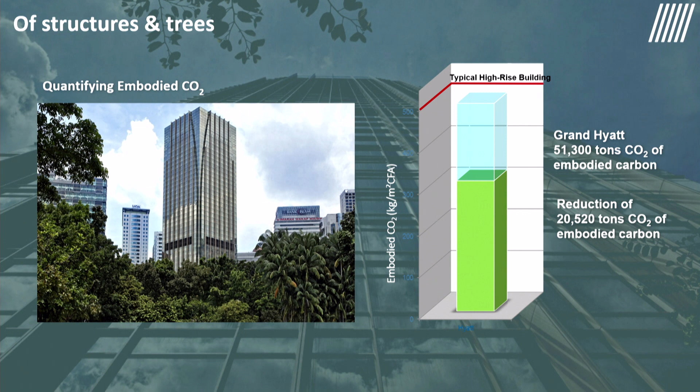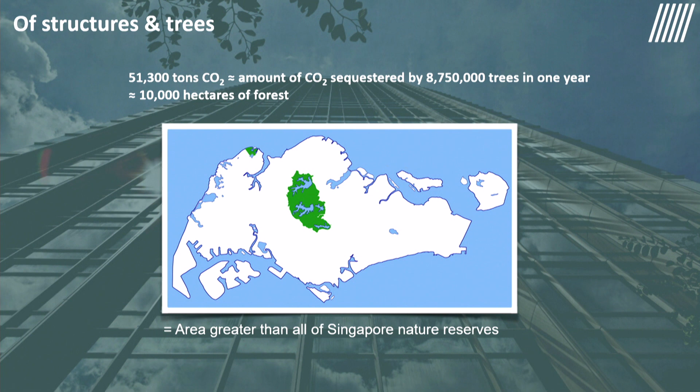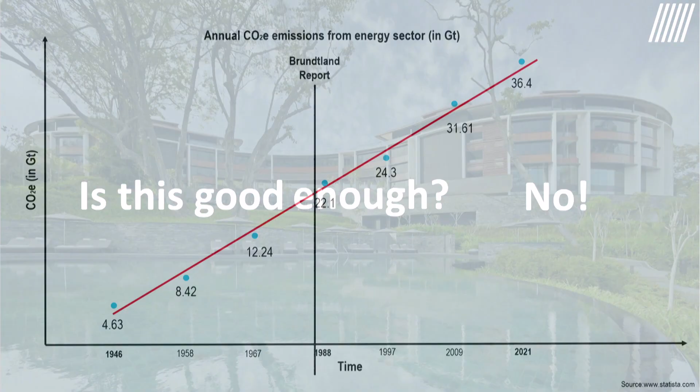the CO2 that we are all emitting into the atmosphere is continuously going up, and is going up in a straight line, as if nobody has done anything to bend this curve. It's just a straight line. Now, this is the one for the energy sector, about 36 or so gigatons, which is about 80% to 90% of the total greenhouse gas emissions into the atmosphere. The point I'm making here is that the vast majority of our carbon footprint is our energy footprint, which is in the energy sector, in fact.

So unless we decarbonize the energy sector, all the beautiful work that we do stays within the realms of optimization. 10% reduction, 20% reduction, 30% reduction. They're good, but they're not good enough. So the disruption in our industry in terms of carbon is not going to come from within our industry, it's going to come from the energy people. And we need to help them in whatever way we can.

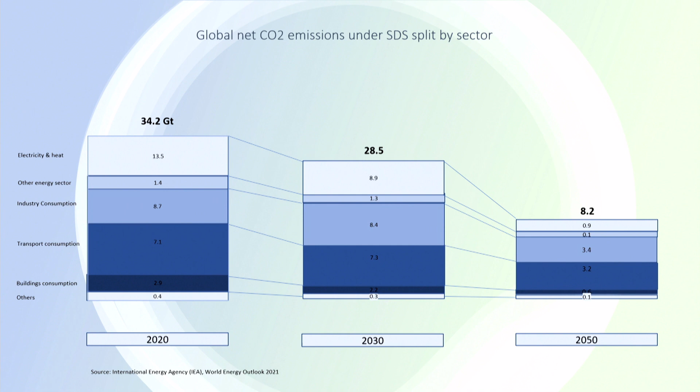In 2020, the total CO2 emissions for the energy sector was 34 gigatons, depending on this sort of division of industries. They are aiming to reduce by 2030 by about 18% to 28.5, and they are aiming to reduce it by 2050 by a whopping 78%. By 2050, even if we build our buildings exactly as we're building now, which of course we're not going to do, we're going to do better, the carbon footprint of our buildings is going to go down by 70%. So that is where the real thing exists. So in a systemic way, we need to work with biologists to understand nature, and we need to work with energy people for the sort of efforts that they do.